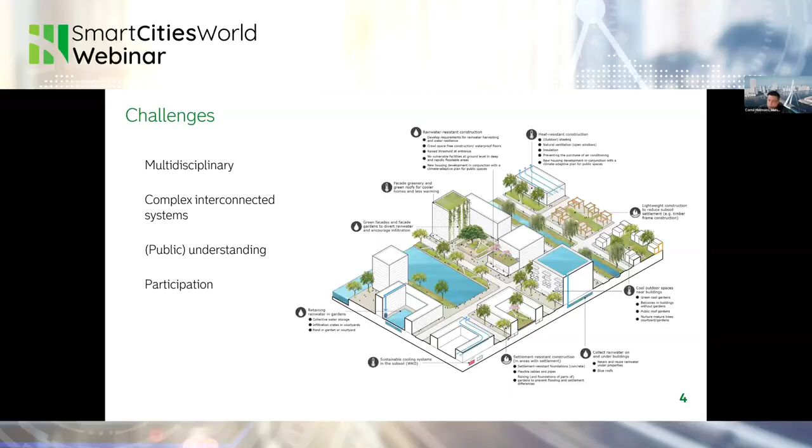So we need to be able to talk with them on the same level, on the same information, and we can't do that any longer with the normal way of dealing with these thick advice reports with some technical drawings behind it. We really want to be able to visualize it in a way that everyone understands it, and that's where the digital twin comes into play.

And as I've said, it's not only about the municipality. So I think we have quite a lot of data sources that we need in order to make this work. So we will have the data sources from Rotterdam, we will have them from the water company, we will have them from private companies as well, regarding water, regarding houses, regarding features in the public domain. And all these data sources need to be combined. And how do we do that?

Well, in the city of Rotterdam, we have developed the Open platform and see it as a catalog on steroids. For us, it's the place where we can register all our data services, and not only from us, but also from the whole wide world. So that everyone can register their data and make it interoperable through open API, through OGC standards, so that the data sets can be addressed and can be used, so that in the end we get a cross-domain interconnected system.

So it's not only for us, it's for the whole municipality. And it's not only about the data, it's also about the apps that rely on those data services as well.

And I think I have a problem. I see a bus stopping with a package, but let's hope the dogs don't bark that hard.

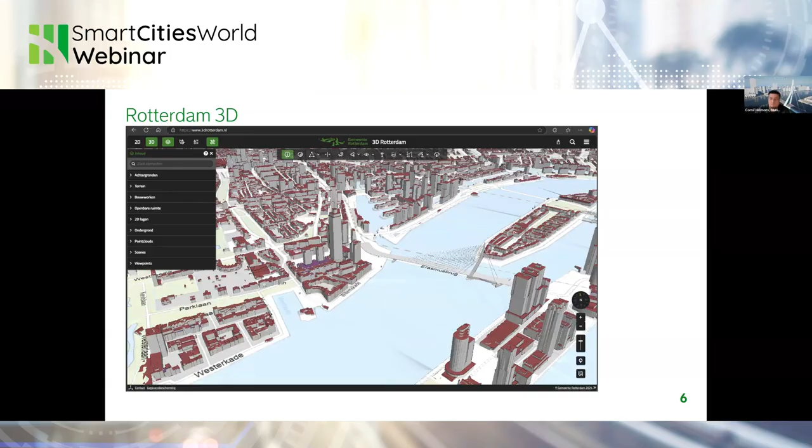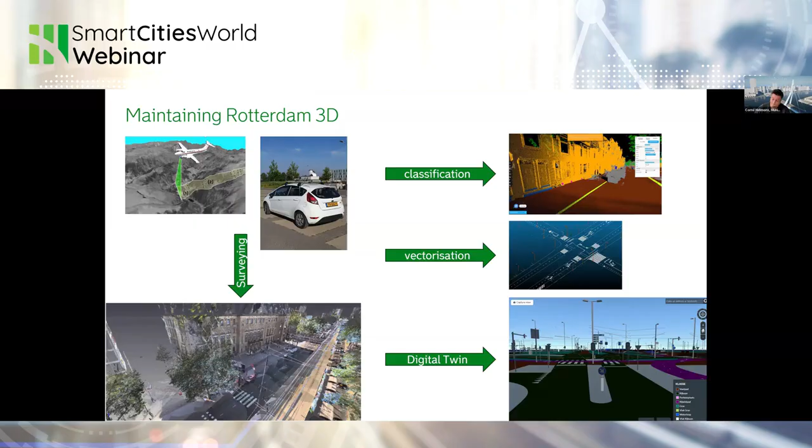And for the maintaining of these services, we use a couple of technologies that we have in place in the city. So we have the airborne LiDAR scan, we have the mobile LiDAR scans mounted on top of cars, so that we can do the surveying multiple times a year. And from the results that we get, we use point cloud classification and vectorization to derive the different products and the information that we need out of it. And then we can translate this into a digital twin data set, so that we are able to update our database and eventually our data services that we can use within a whole range of applications.

Now, in this digital twin ecosystem that we are talking about, we are working closely together with the Dutch Normalization Institute, Geonovum. That is running the NLDT program for us within the Netherlands, and that's a European-based bigger scale program, where we describe the overall architecture of building an ecosystem for digital twins.

So what we are trying to do within Rotterdam is we want to keep the solutions really separated, so that they are scalable and connectable. So we have a data silo, we have analysis modules, we have visualization applications, and we combine everything together through the fundament based on APIs and open standards. By doing it in this way, we make sure that we don't get a vendor lock-in, and we have everything interoperable and reusable.

So this is just an example of the open platform that we have, the catalogs where we can register the data services and the applications, and one of the showcases of IMAGEM where they simulate the rainfall and the water levels within a digital twin application.

And one of the nice things that we came across in this whole process is that a couple of years ago we ran a big program in the Municipality of Rotterdam. It's called Totally 3D. It was a big collaboration between Rotterdam, The Hague, and Amsterdam, where we worked on the integration of the 3Di platform, the rainfall simulation tool from Nelen & Schuurmans. And we did that based on our web viewer for Rotterdam 3D. And that was just the first primary tool that showed the results of a rainfall simulation and just as plain 2D GIS web services.

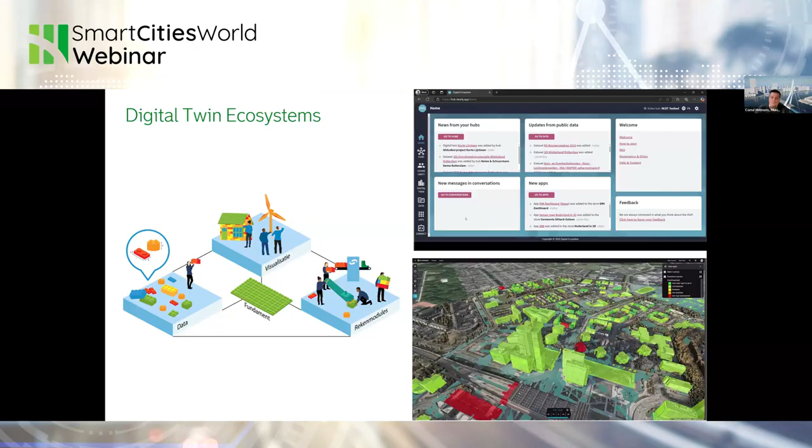And I think the best part was that after that project was delivered, I got a call from Nelen & Schuurmans, and they told me, oh, well, we've done something really cool together with IMAGEM. I want you to have a look and try to embed this within the Rotterdam ecosystem and see that we can develop this any further. And that's what we did.

So based on the ecosystem architecture that I was talking about of Geonovum, last year we made a presentation, or actually a demonstration, I think you should call it, about the integration of the whole ecosystem. So we have the data service of Rotterdam 3D. We have the open platform where you can register our data services. And when you combine everything together, it looks kind of like this. So this is the register of the open platform where all our data services are addressed.

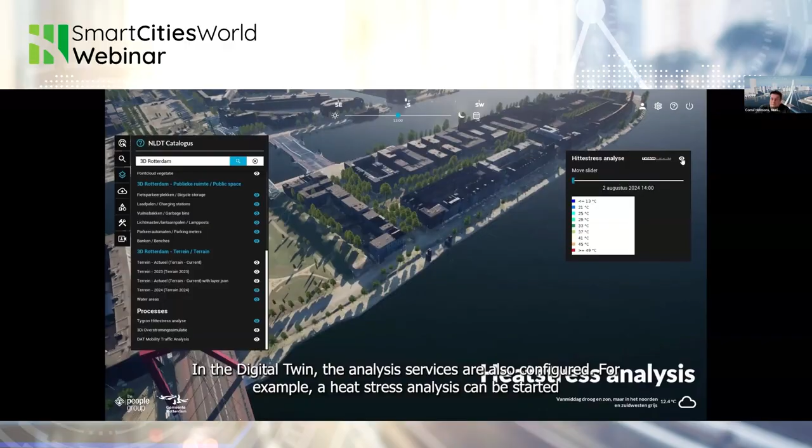And from here, you can just run your visualization application. For this example, it's Unreal, but this can also be IMAGEM or whatever sort of platform you are using currently. From this connection, you will get an answer of the server which services are already available and discoverable for you, so that you can just click and add those to your digital twin experience straight away. So based on your information needs, the user can configure their own digital twin experience and visualize the data sets that we have. And these are actually the same data sets that we already had in the online platform.

And this is an integration with the heat stress analysis. This is still a pre-calculated result, but the idea is that within the next couple of months we are going to work further on making a dynamic connection, so that we can not only show pre-calculated results, but also really start working with those tools through API calls, so that we can do it on the fly and manipulate the analysis parameters.

And this is actually the result of the integration with 3Di, with the rainfall simulation. So now you can see the water levels rising, and it starts raining within the engine, and you can see the effect of the water levels on the buildings. And this was just a bonus from the project that IMAGEM did together with, I think it was, the city of Almere.

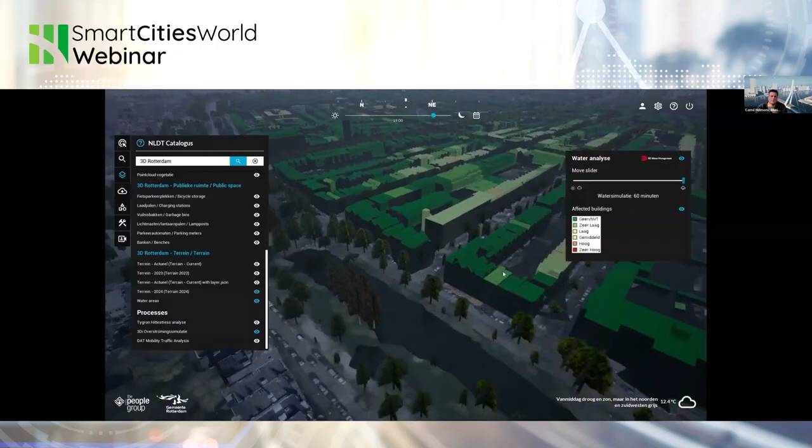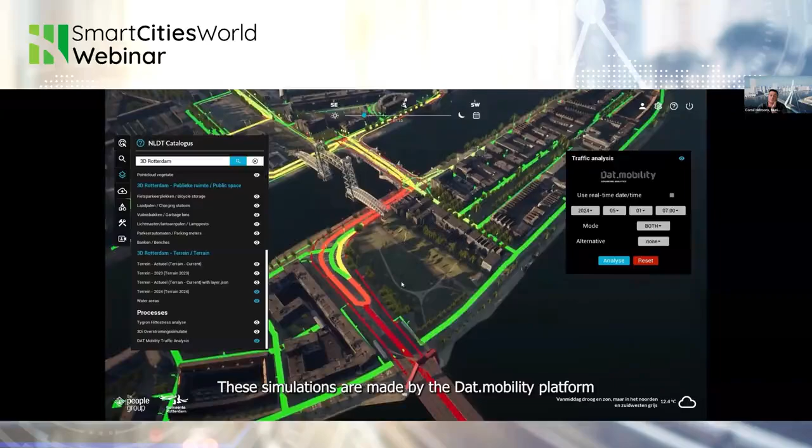And we did the same with the Dat.mobility platform. This is a traffic simulation, traffic prediction system, so that you can see the real-time traffic information, but you can also see historical data sets and make predictions about future situations, so that you can really play around with the effects that it has on the city.

And yeah, well, it is a digital twin ecosystem, and that means that it's getting quite big in the end. On the data service side, we have 2D geographic streaming data. We also have BIM data. We have 3D tiles. We have SensorThings APIs. We have BIM data like IFC that's also being converted to 3D tiles. And it's quite a lot of applications that we have connected at this moment.

And we have the same for the calculation models. So we have the analysis platforms like 3Di for the water management, Tygron on heat stress, Dat.mobility for the mobility issues, Sinergis for traffic and pollution and noise calculations. And everything is streamed through OGC 3D tiles or WMS, WFS services.

And on top of that, for the visualization part, we are not only looking into Unreal as a desktop application, but also web-based applications like VC Map, PlanSpace from IMAGEM based on Luciad Hexagon technology. For AR, we are looking into MyVR at this moment together with IMAGEM. And we are also collaborating with a local company, the 360 Fabriek, that's building an implementation based on Unity. And for VR, we are looking into desktop applications, but also web-based and also right into the goggles.

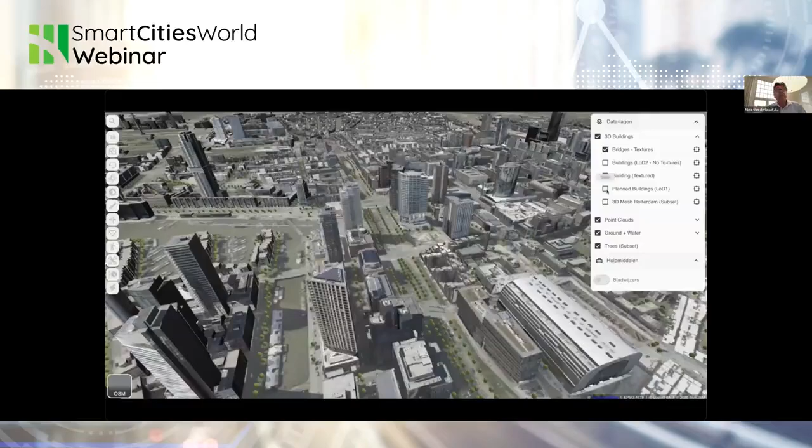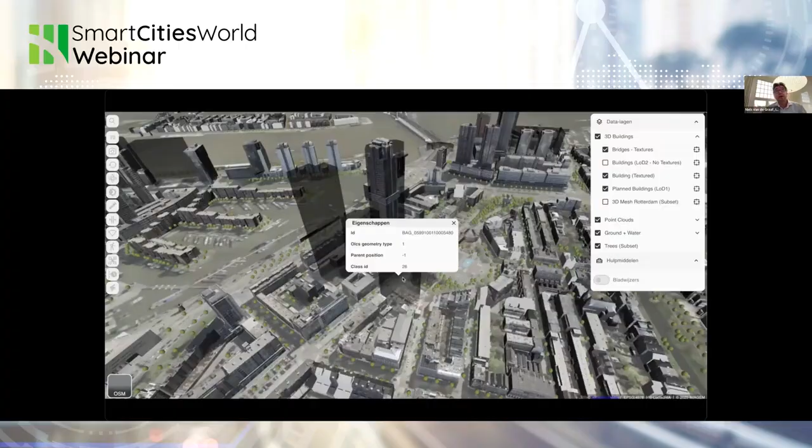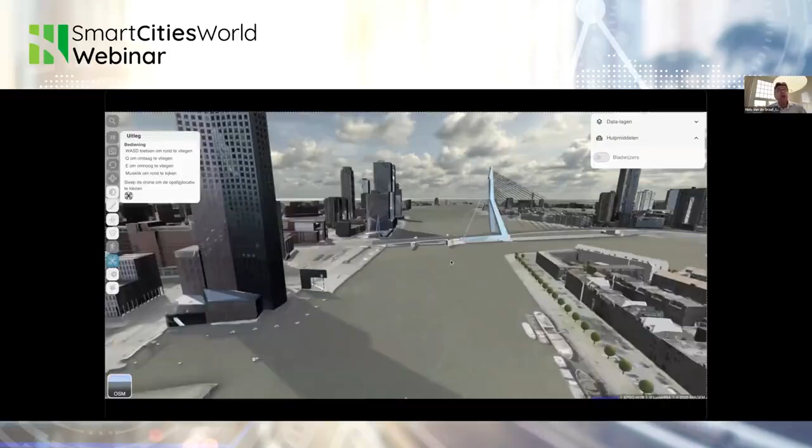Here you can see a bridge also brought into the digital twin from BIM models, IFC models, and we fly through it like a drone. It's a feature to fly throughout the city or area you want, as a walkthrough, but then via a drone. We use the Luciad technology for this, so not a game engine, but a technology for geospatial data with 3D engines in there.

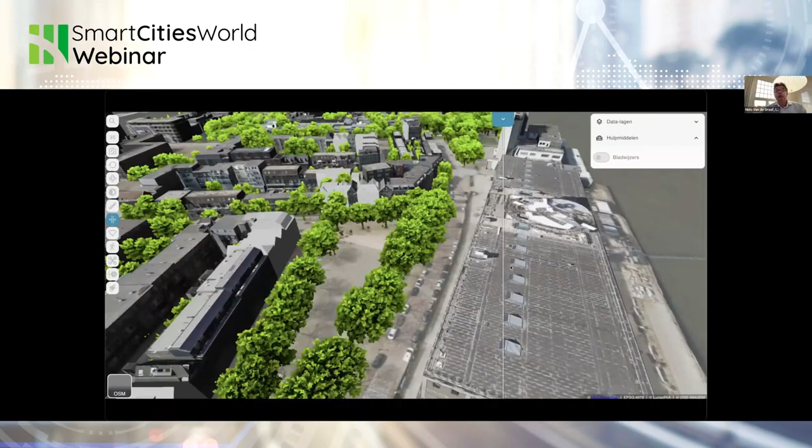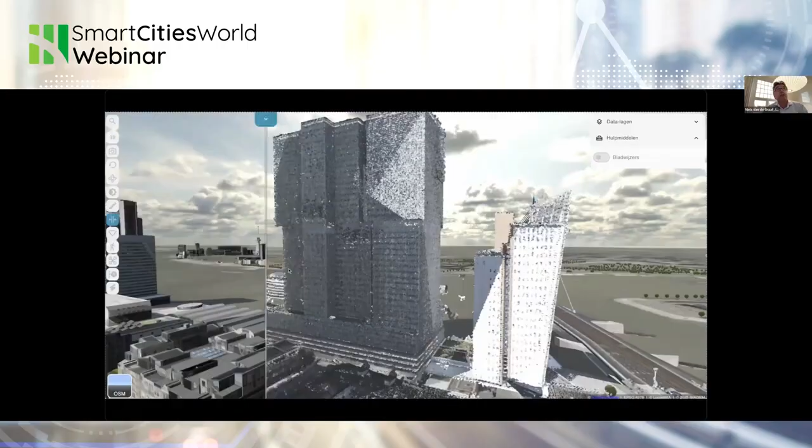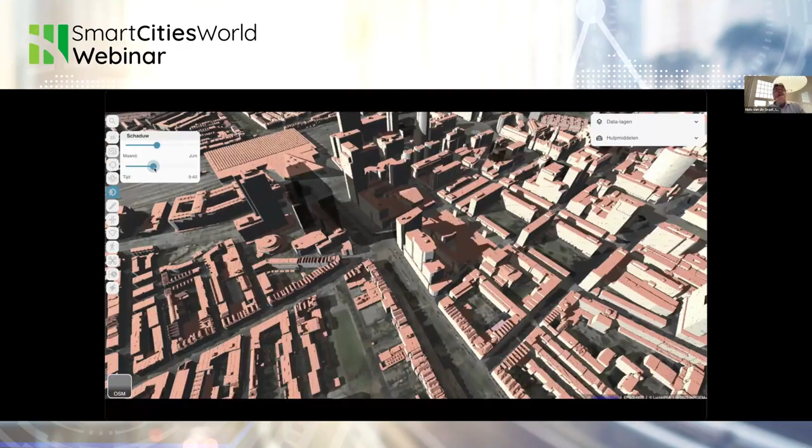And here you can see you can have unlimited point clouds together with other object kinds of methods for trees. Here you can see the point clouds of the Municipality of Rotterdam, actually. That's their office building, also a hotel and some other offices there. A ship is there as well, also being shown. But just to show you that you can use 3D objects as well as point clouds, here you can see the shadow analysis for a planned building, and you see immediately which shadow it will cast over other buildings. This is also quite interesting.

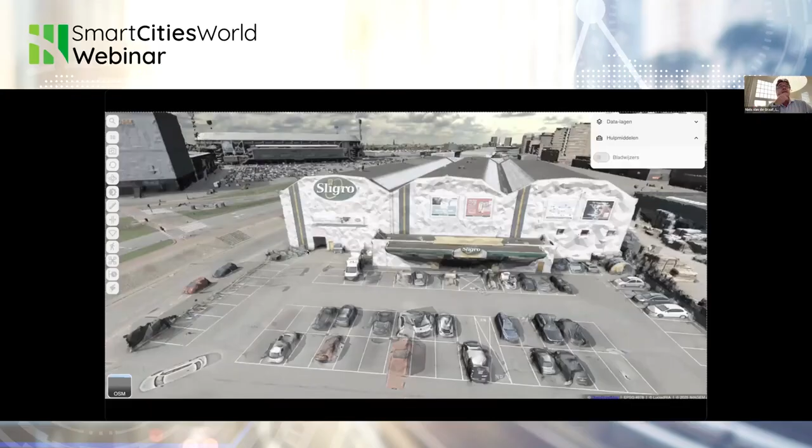This is from a drone, so you can also fly with drones, use the drone software to create a 3D mesh, and you can instantly use it and show it in your digital twin.

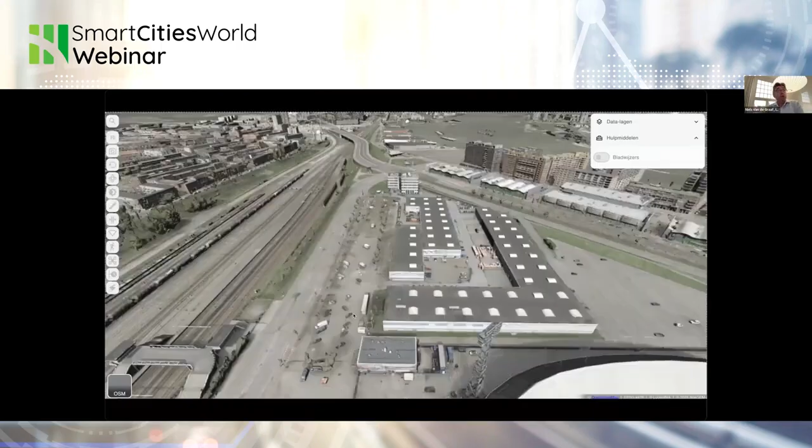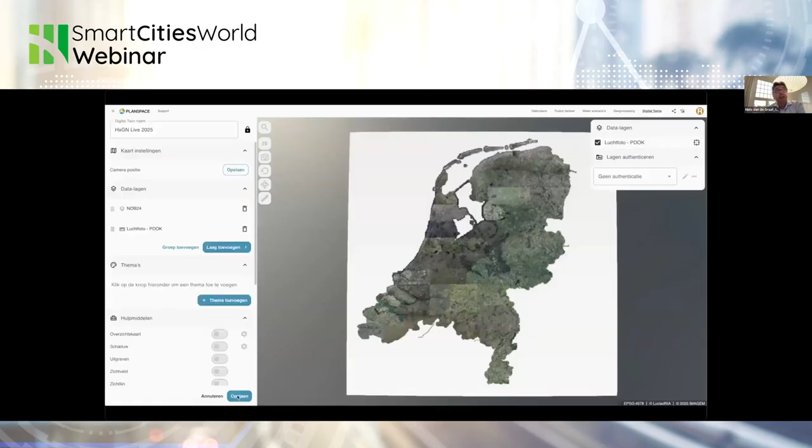You can walk through it, you can do measurements, and all at the ease of a button. Then something we are also quite proud of, a collaboration with a Dutch company for presenting 3D high-quality meshes. So that will be shown here. It's from HXDR. And you can see here also the same part of Rotterdam, which I've just shown you, but in a

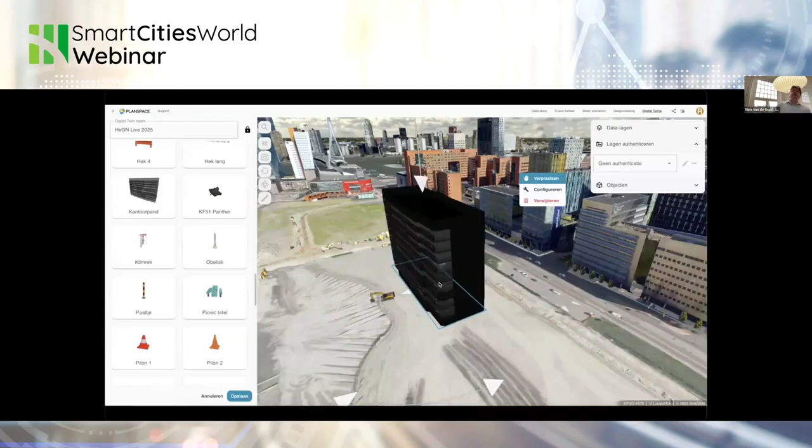different resolution. And now we will work with BIM models, the IFC model. And there are several ways to do it. I can just create a catalog by dragging and dropping the object and placing it in an area just to create a situation. Let's also put there an office building. And again, this is for easily showing what it could look like when you are really planning a situation

like that. We also have an automatic conversion of IFC models to the digital twin to make it as easy as possible for the user. You just point out where you want the building to be, and it will place it exactly where you point. And this is quite difficult because most of the architects or project companies create IFC models, but not geographically. And we've created a way so that the user can easily change the position of the building.

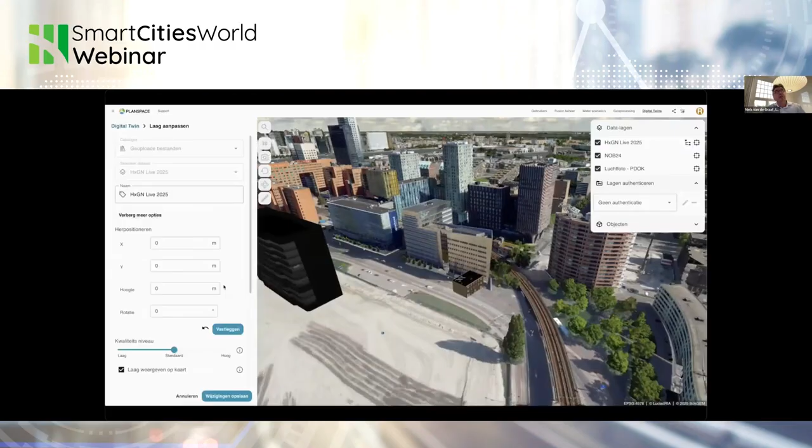And then again, I can put it anywhere I would like. I can do my measurements, I can do my analysis, I can do anything with it that I want. I can look through the tree information in there. I can look through all the details in there and use it for whatever process.

Lastly, in this video, also some prediction on the deformation of the soil. So we point out here the area where we want to build. There's a calculation on there which is telling me which part of that area will have troubles with deformation and which area will not. So it will easily tell me where it is possible to build or not.

Then I will switch. This one can go. Let me just switch it here to another screen, and then there's two small real-life examples, and then my part is done. And the reason I wanted to show you this as well is to show you that if you have 3D objects, you can start by building your digital twin.

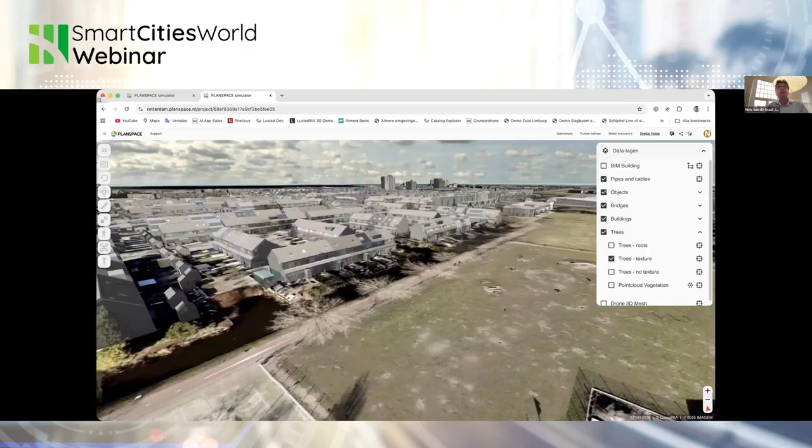We can see here the housing, which Rotterdam has also in their open urban platform. I can use it, for instance, looking where there are sewages or cables underground. I can use any data I would like to have, for instance, the trees. I can have several kinds of trees. The most popular, the lollipops, of course. I can use the trees with the textures, which is also in the same database in there.

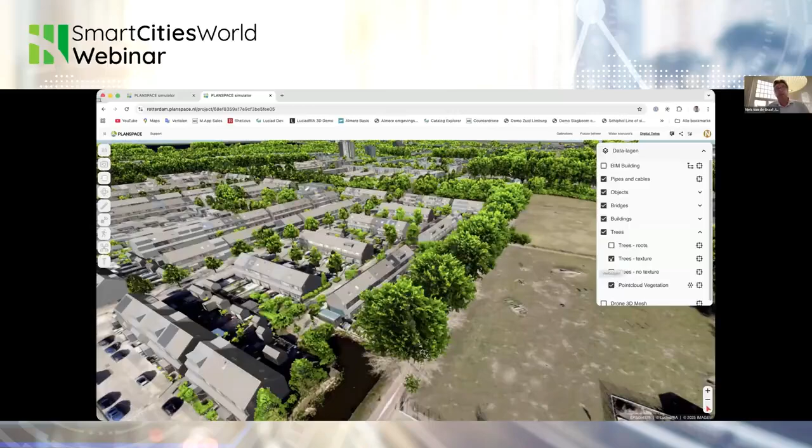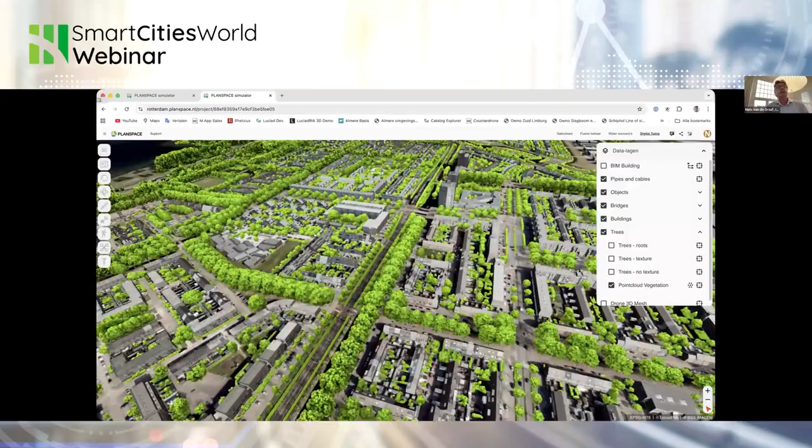It's not. Here we go. There it's coming. It's loading the complete Rotterdam, and because I'm using Zoom, it takes just a little bit more time. But I can also get the point cloud of the vegetation. So just wanted to show you here how easily you can use several kinds of data. It's all open standards, and I think that's the best way of sharing the information. And as you can see, it's the complete Rotterdam, and the performance is actually quite good even when using the Zoom application.

Also wanted to show you when you convert an IFC model, if it is a large model, a small model, or a point cloud, doesn't really matter to us. You can upload these data, and it will convert the IFC model to an OGC 3D tile. And there's an upload button here, to the Open Urban Platform of Rotterdam, so that anybody else who has access to this Open Urban Platform can easily connect to that data.

Last but not least, we also have a new digital twin for the Municipality of Rotterdam, for deciding which of the 250,000 houses can be taken off gas. Oh, hold on. Yeah, here we go. And my colleague Reinier will talk to you in 3 minutes' time about what we are doing here. 3 minutes, not very short.

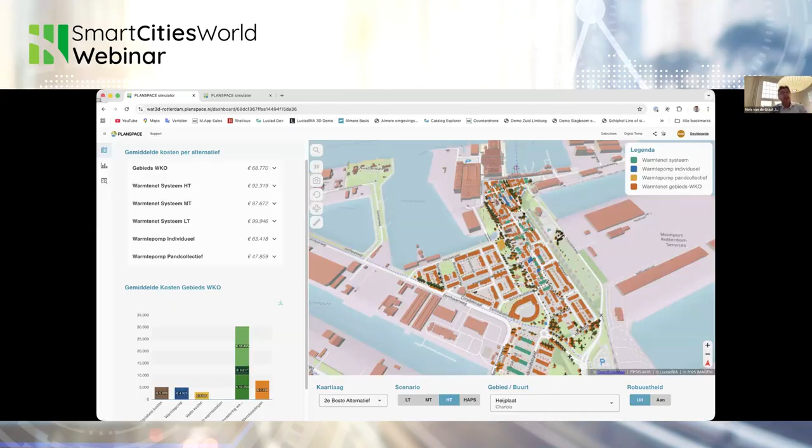So that's it. The next speaker can take over the presentation. Cool, I do my very best. And here we go. Hope you see my screen. Yep, all good. Perfect. So thanks a lot, Corné. Thanks a lot, Niels, for setting the stage.

And as Corné really nicely pointed out, when we speak about urban digital twins, it's a kind of an ecosystem. So we have multiple elements within this ecosystem for visualization, for IoT stuff, for the models, for the semantics. And I'm going to show what we are going to do here with the climate simulations, which we apply in different twins. When we talk about climate simulation, I think we first need to talk a little bit about what we need for that. First of all, of course, we do need a 3D city model because that sets the scene, that sets the context, that sets the frame. And we have seen so far a lot of beautiful visualizations of the Rotterdam model. So congratulations to that one.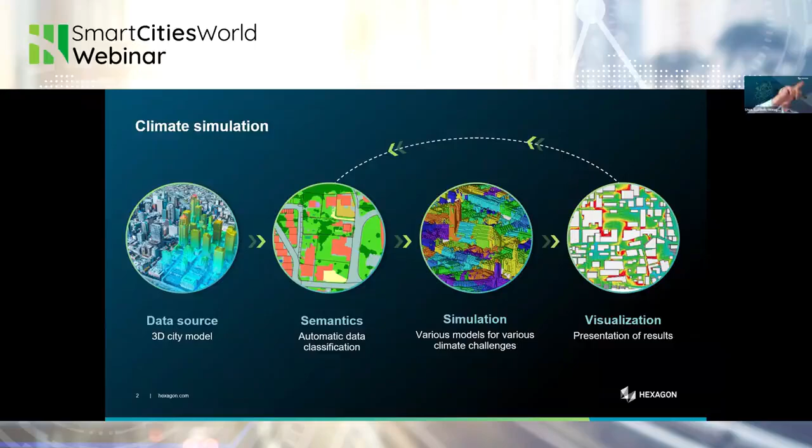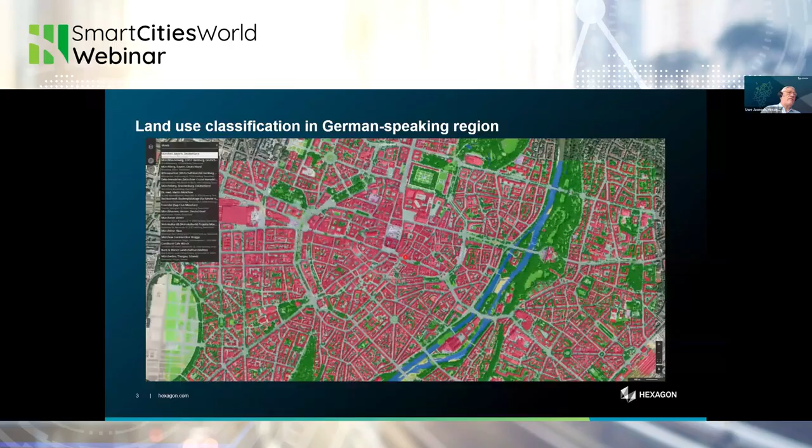Now I will start a bit with the land classification, just to give you an idea how it looks. We did ourselves a big favor and took the data from Germany, Austria, and Switzerland, and went straightforward through the land classification. As you can see in this non-cut video, you can select any location in these three countries and get the semantics: what is green space, what is blue space, where are the buildings, where are the trees. So this is setting the scene. And of course this also works outside of these three countries, but this is the basis, and on top of it we start the simulation.

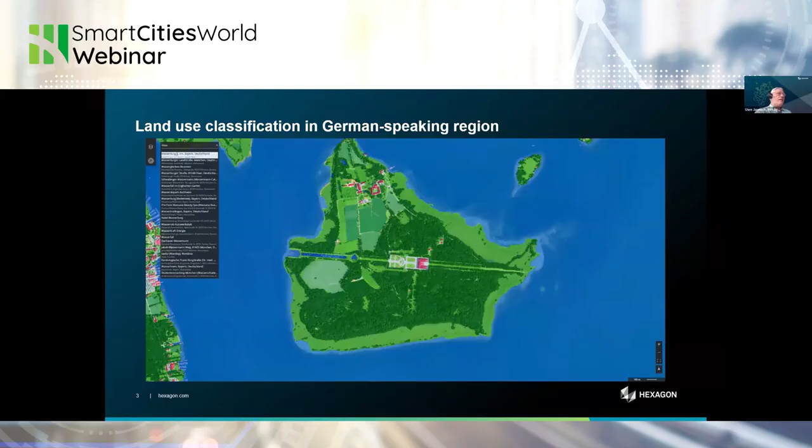As I said, wind is one of the key elements. Even when we talk about heat, wind is a key driver. You can of course also simulate only wind. Why is that important? If you go to cities with an interesting topology, like being in a valley, the movement of fine dust particles and bringing them out of the city is primarily driven by the wind axis you have. So you need to plan the city so that you bring in fresh air and get out the dusty air.

In order to do so, you need to make a wind simulation. Also notable is that even if you're making a wind simulation for something like a square kilometer within a town, to make it correct you take that square kilometer, then make a buffer outside which is a little less detailed, and then the next buffer, even less detailed, in order to really have a correct streaming of the wind in your area of interest, because obviously wind doesn't start out of the blue and end in the blue. You need a fine model and enlarge it to make this correct.

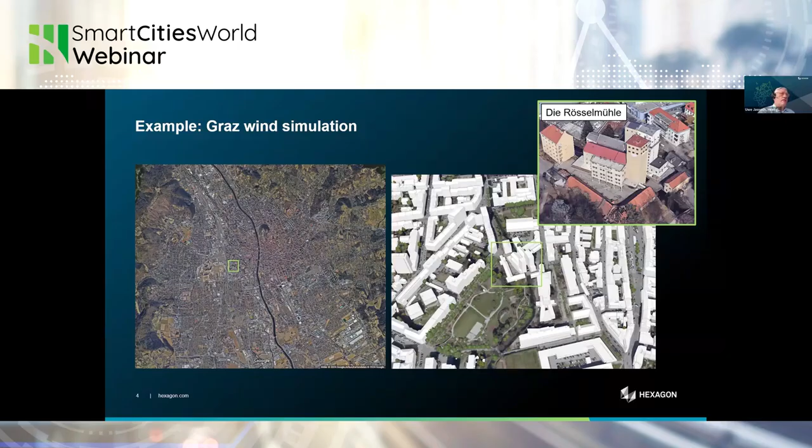Here is a simulation from Austria. They have a building which is no longer in use, so we have here an LOD2 model. The question is, what happens if you remove the building, and how does it affect the wind stream in that quarter? As you can see, this is the situation when the building is active, and you see here how the wind streams are and what is the speed of the wind. As you can see, you have some blocking factors. If you remove that building, we see we get a pretty nice corridor with a good through-streamed wind channel, which is pretty nice.

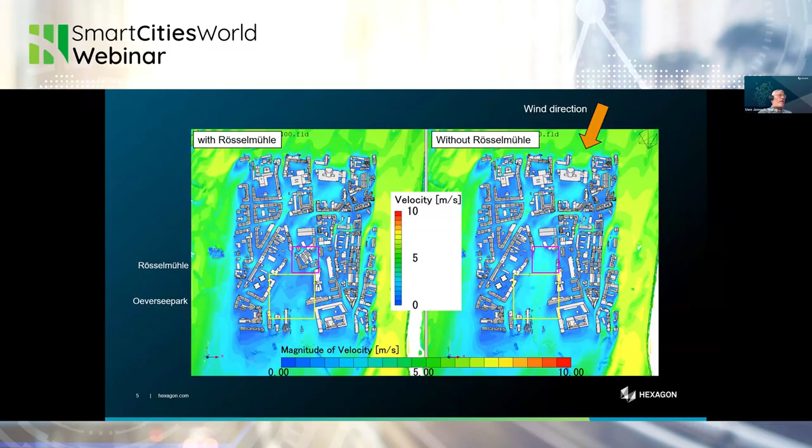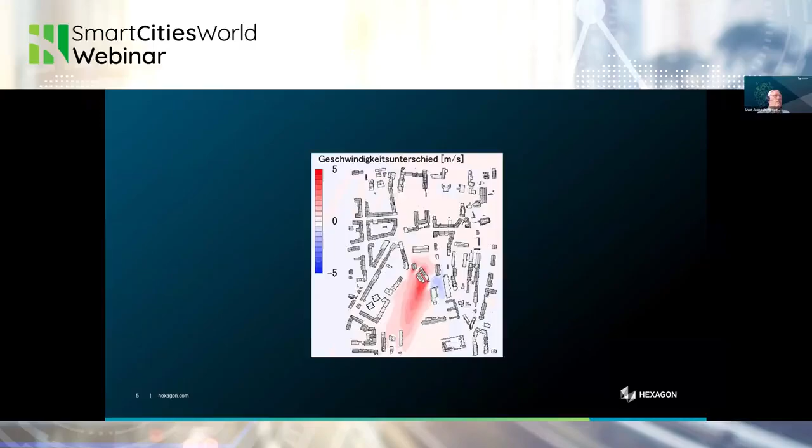Of course the next step, but this is for political reasons not appropriate to show in a webinar, you can go ahead with IFC models and show how these IFC models affect the area. But just by removing that building, you can also create a delta map which shows the difference between with or without the building. So this is a pretty cool tool for city planners if they want to think about, if I have a change in the existing scenario, how is this affecting the wind situation? Or, as Cornet and also Niels showed, if I'm going to plan new buildings or changes in a quarter, how does it affect the wind situation there?

Similarly, we can go with the heat simulation. Basically this is the inner part of the city of Klagenfurt, one of our reference customers. In order to do the simulation, you need to give the wind direction, the wind speed, some surrounding area elements, but also the heat, the wind temperature, the water temperature, and the humidity, because humidity is very important when you consider the perception of that heat.

The higher the humidity, the worse the feeling. Now, when we run the simulation, we end up with something like that. That's the way it is.

We had the luxury of having a customer of ours who was doing some thermal flights, and we gave ourselves a challenge, and we're running a simulation against the real captured data. So we asked the weather forecast for giving us the data with the attributes of temperature, relative humidity, and then we run the simulation.

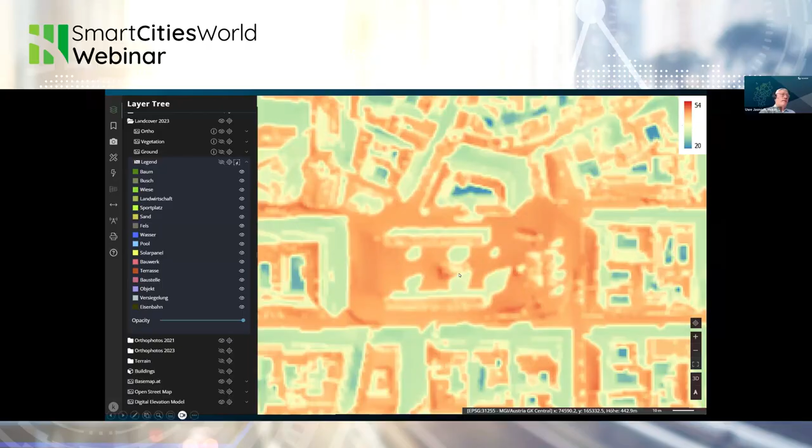That means, and the heat is a beast in terms of how it changes temperature over distance. So what we are also doing, in order to make it more concrete, we go to an ISO standard, which is the wet bulb globe temperature standard, and it defines at a certain height how you're going to measure and simulate the data and retrieve an index.

And funny enough, a lot of sportsmen do know this index because, for example, in the last World Championship in soccer, the drinking pauses were defined by this index. And you can see here that depending on the index, you see the threat to the different age classes.

So that's really an interesting one because it's not on the ground. It's at a certain height, and this is really the relevant part for that.

And the cool thing about what we have done is that we have a complete round trip automated. That means we can automatically generate the semantics. We do have a user interface to interactively analyze the scenarios and set the parameters. We run the simulation, we display the result, and then we start looping it. And that's, from my perspective, what's exactly needed if we really want to change something on a very solid basis.